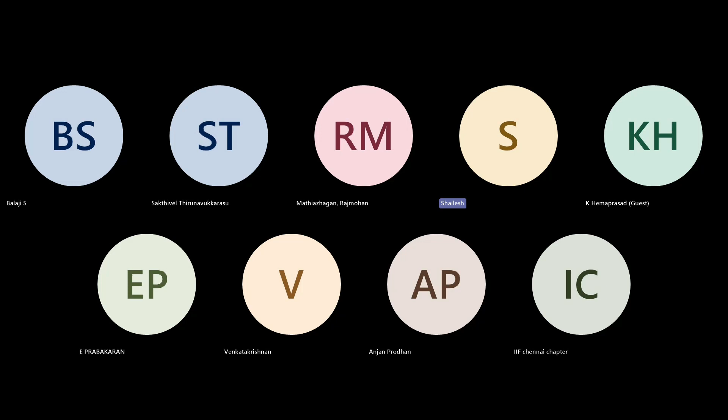Okay, first of all, thank you to the IIF Chennai chapter for giving me the opportunity for this presentation on the topic related to foundries. My topic for today's webinar is removal of impure layer through shot blasting process.

Before starting this presentation, I wanted to brief where I'm working, what I'm doing, and what my company does. So I'll brief about our company, Pometon India, what it manufactures, and how it manufactures.

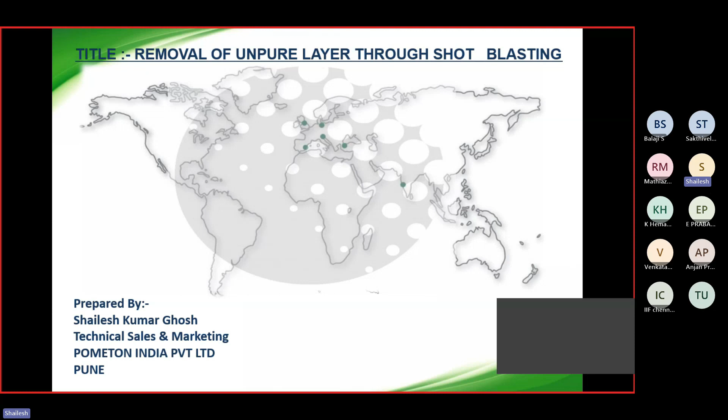Pometon India has an experience of 80 years in the production of metal powders and granules. It's based in Italy, and our manufacturing unit is in Italy, with close to 160 production employees at the Italy facility and a turnover close to 100 million. That is the data for 2021. Our headquarters is in Maerne, Venice, Italy.

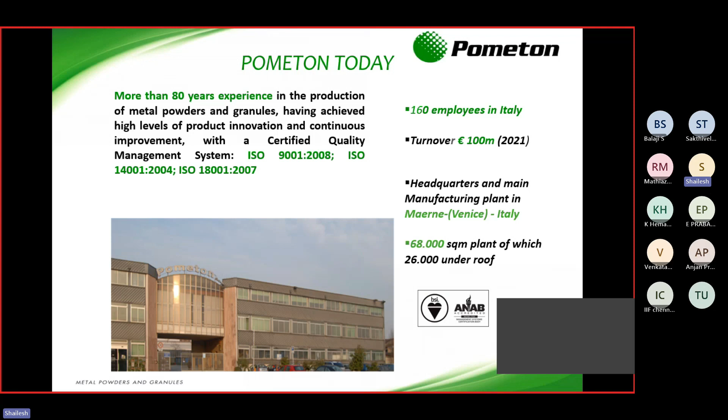This is the only company in the world which manufactures metal powders, both ferrous and non-ferrous, as well as stainless steel powder. We also manufacture stainless steel granules for shot blasting process. We have several sales and marketing offices in different parts of the world, like Germany, Turkey, UK, Spain, Italy, India, and Serbia.

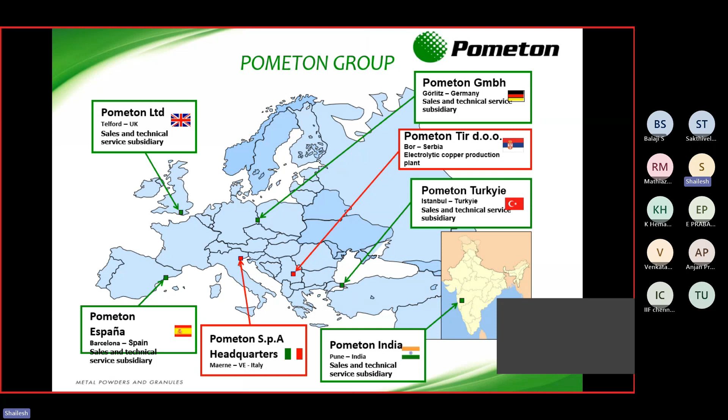Pometon manufactures both ferrous and non-ferrous powders, as well as stainless steel shots in its product portfolio. In ferrous powder, we have different grades of iron powder including high alloy, pre-alloyed iron powder, diffusion bonded grades, and plain iron powders. In non-ferrous powders, we have different grades of copper, brass, bronze, zinc, tin, and nickel. In stainless steel shots, all grades like 304, 430, and 202 stainless steel grade for blasting are available in the product portfolio.

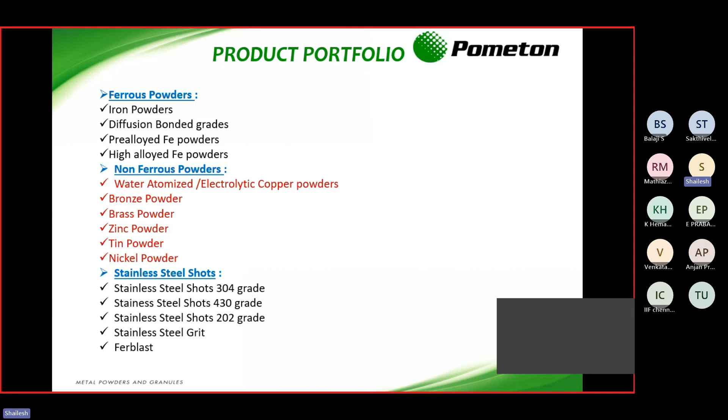Now we come to the topic: what is shot blasting? Shot blasting is a surface treatment process utilizing high velocity shots and abrasive. Shot blasting is a strategy through which it is conceivable to get great cleaning and surface treatment for secondary operation.

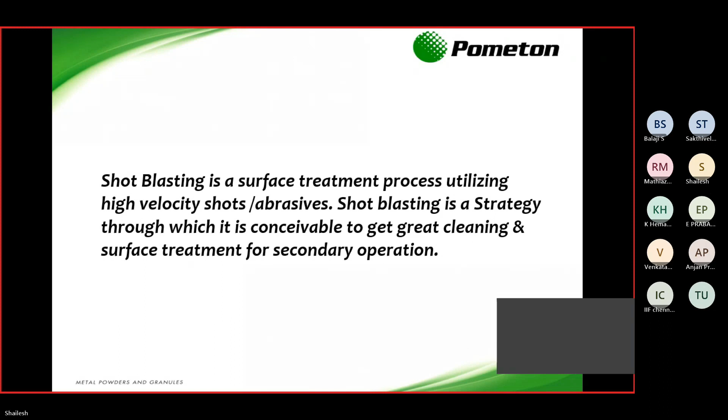This question arises very frequently from many manufacturers: what is the difference between shot blasting and shot peening? Shot blasting, as I already told you, is a cleaning and surface treatment process through which we clean components for secondary applications like coating, painting, and other things. Shot peening is a process of modifying surface material properties through the addition of compressive stresses; its main purpose is to improve strength and fatigue resistance. Shot peening is mostly used in industries like gears, springs, and pistons, to increase fatigue strength and avoid wear of the gears.

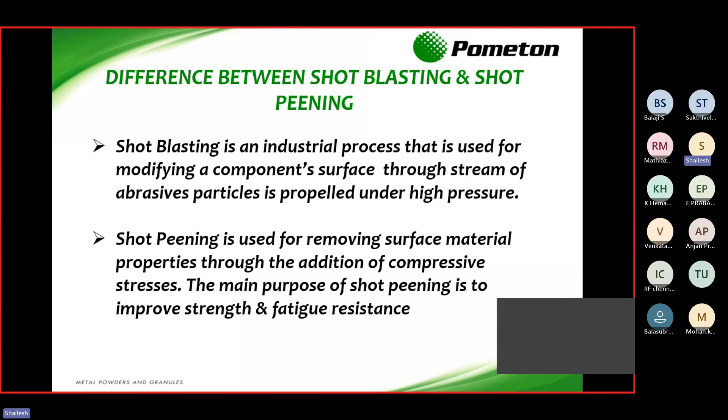So, shot blasting is utilized mainly for applications like iron, steel, non-ferrous casting, forging, GDC, PDC, LPDC, investment casting, etc. Other applications are preparing surfaces to be painted and coated. Before that, we require shot blasting to remove the oxide layer from the component and avoid peel-off issues after painting and coating.

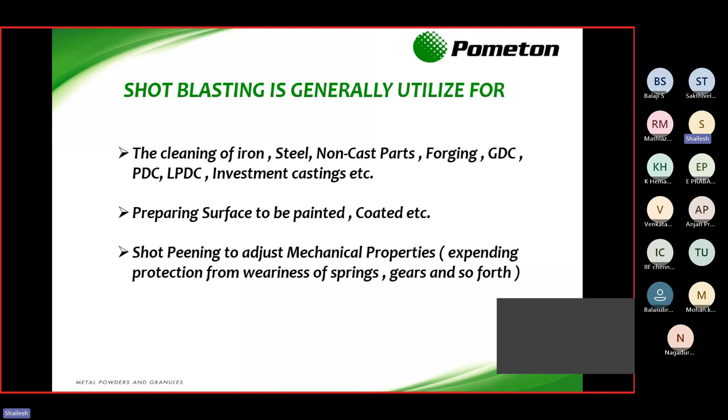Also, shot blasting provides uniform surface and aesthetic look for better appearance. And while shot peening, as I already explained, it is used to increase the stress and wearness of spring and gear. So these are the different applications used mainly in all the industries for shot blasting.

Actually, almost in every industry we can see now shot blasting is being used. If you consider automobile also, automotive components, aviation, everywhere it is mainly using shot blasting for surface cleaning and surface preparation. So these are some of the applications like in shipyards, cleaning and preparation of profiles and sheets before painting, portable machines for the maintenance of ship hulls.

In automotive components, we know it is almost used everywhere, whether it is LPDC, GDC, PDC, investment casting, etc. Also, shot peening applications are used in gears, springs, elastics, gearboxes, piston connecting rods, etc. Or in automotives, cleaning and preparation of truck tires before painting, brake shoes and clutches. In brake shoes also, where adhesion is required, it has to be done through the shot blasting process, because after that only proper adhesion is achieved.

Cleaning and rectifying of engine components, block, pistons, etc. Screw mechanical descaling. In aviation, portable machines for rubber elimination and roughness in the airport tracks. As we have seen already, the marks of the tire which come while take off and landing, it can be removed through the shot blasting process. Shot peening of airplane components to increase fatigue resistance, airplane paint removal, etc.

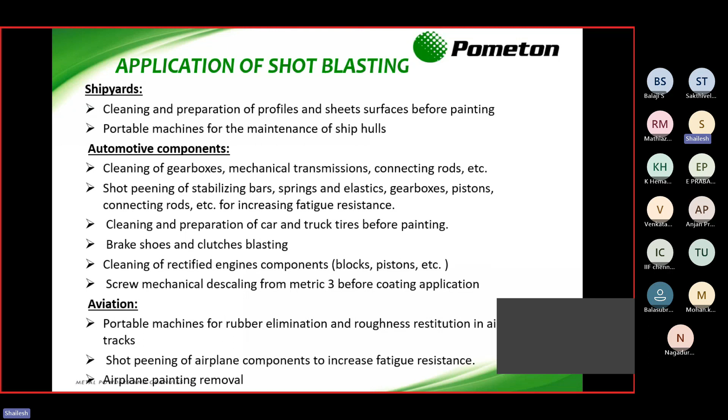Some other applications are like in motorbikes, cleaning and preparation of bicycle frame and tires before painting. Rubber, cleaning and preparation of steel parts before rubber application. As we know, if we have to join some rubber with metals, it requires a very rough surface for proper adhesion of the rubber and metal.

So in certain applications, we have to do shot blasting with more roughness which can be used for proper adhesion. Concrete and ceramics also, for blasting of non-slippery floors, artistic blasting, coach builders.

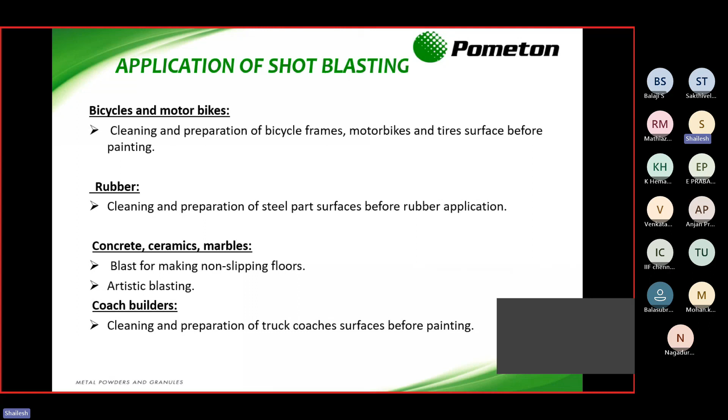Nowadays, as we know, India is making all the coaches like Vande Bharat and other coaches. We are exporting also. See, a large number of shot blasting machines are being used. We use it for coaches before painting.

Metallic structure and profiles - these are all applications of shot blasting. Cleaning and preparation of steel and profiles before painting, we all know. In iron foundries, removal of foil, framework, surface homogenization, melting of iron, steel, bronze is required.

Cleaning of painting system hooks. As we know, this is where the painting application happens in certain industries. So what happens after painting, all the jigs are full of paint and other additions, so it has to be removed. It has to be removed through the shot blasting process only. And in this application, most of the time zinc shots were used.

Zinc shots were used because they are non-flammable actually. But if you use other shots like stainless steel or MS shots, they may catch fire. So most industries use zinc shot for this application, mostly for cleaning of jigs in the painting booth.

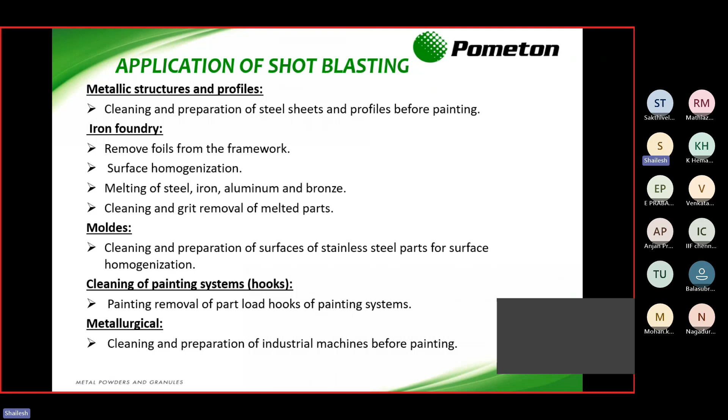Metallurgical cleaning and preparation of industrial machines before painting. Petroleum and gas - cleaning and preparation of CNG gas cylinders and petroleum stationary tanks before painting.

All these applications are very necessary before painting, because if you will not do this blasting, later on the peeling-off effect will occur after painting. So blasting is necessary. Blasting and shot peening of petroleum pump rods to achieve the desired stress.

Iron and steel industries - mechanical descaling of round, hexagonal and square bars for wire drawing operation, mechanical descaling of coil rods. This is important actually.

Nowadays we can see, for fastener manufacturing, coil rod is blasted before making fasteners. But earlier, chemical process was used for the descaling purpose, but that was too expensive, even more time-taking. So now, after shot blasting has come, time has reduced for the descaling process, even expense is less. So all these are the advantages of shot blasting over using chemical process in coil rod cleaning.

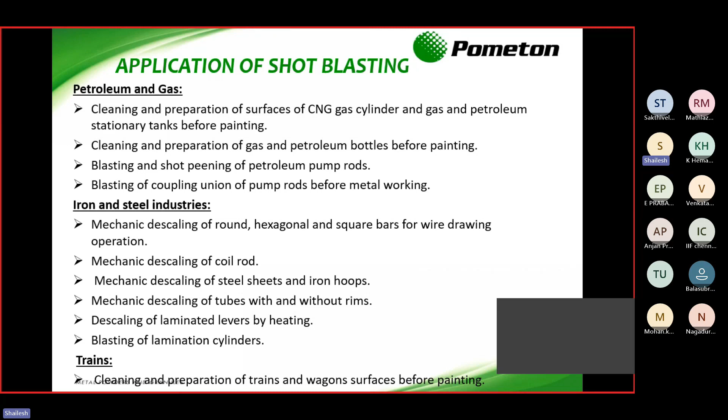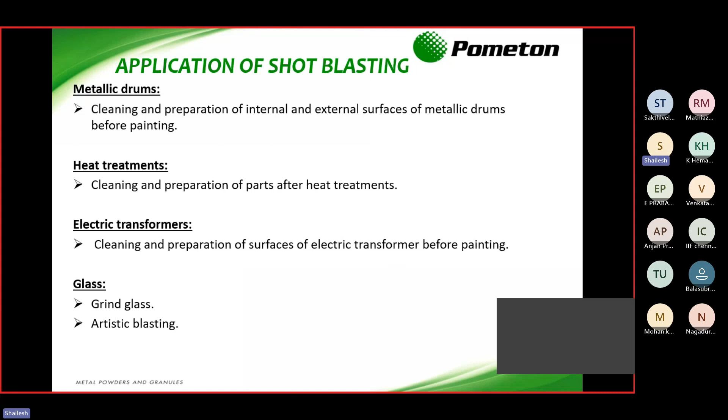So all these are the major applications of shot blasting. We can see different sectors also - we are using it in electrical transformers also. We have to do certain shot blasting operations for the cleaning and preparation of surface in electric transformers. Basically, these jobs are done before painting and any coatings to achieve proper surface finish.

Now, I'll explain the cast shots manufacturing process, how the shots are manufactured.

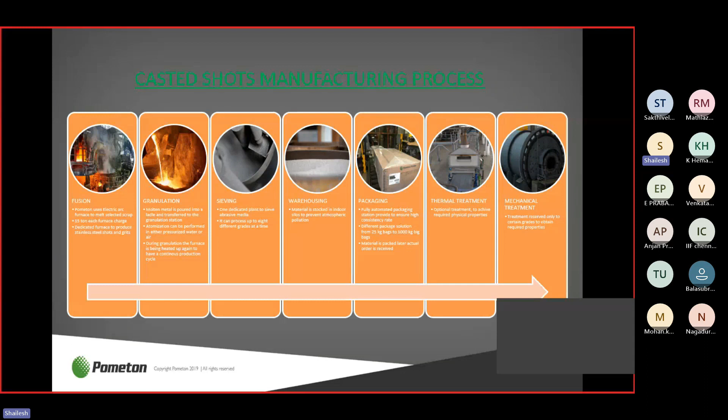We can understand there are different abrasives we are using for shot blasting, like cut wire shots, stainless steel cut wire, MS shots, MS casted shots, and other abrasives used in the shot blasting process. I'll explain the brief of casted shots manufacturing process, how casted shots are actually manufactured.

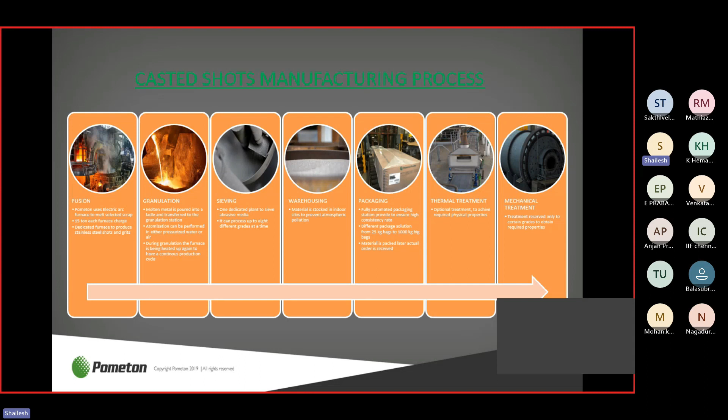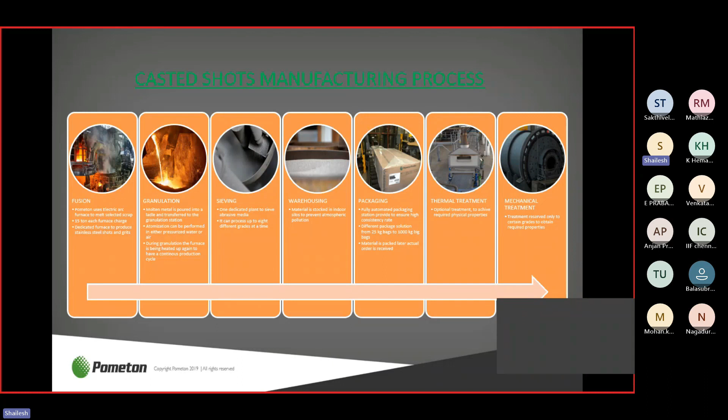The first step of the manufacturing process is fusion. In this process, all the alloying material and scraps like iron, chromium, nickel, whatever grade of shots we want to manufacture, is fused in an electric arc furnace. These furnaces have a minimum capacity of 25 tons at one charge.

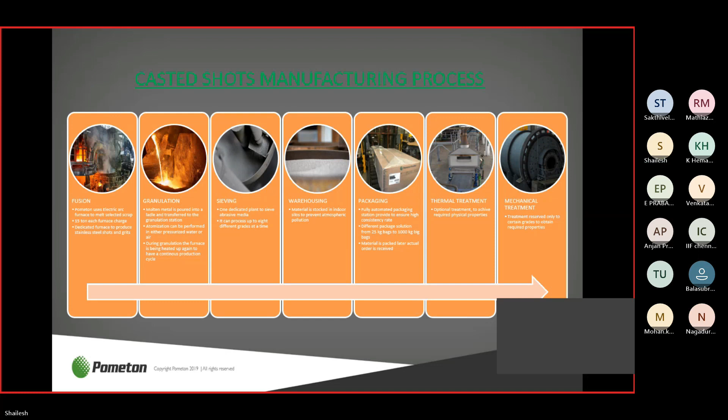So in this process, all the alloying materials are melted in an electrical arc furnace, and then it goes for granulation. What happens in granulation? We have to give the shape, round shape, to the shots. In this process, molten metal is poured into a ladle and transferred to the granulation station.

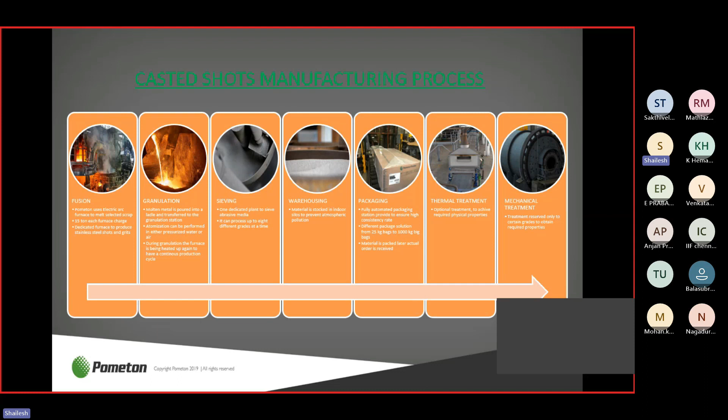Here we do air and water atomization to give the proper shape of the stainless steel shots. Atomization process can be either by air or water, both, depending on what categories of shots we require. During granulation, the furnace is being heated up again in a continuous production cycle.

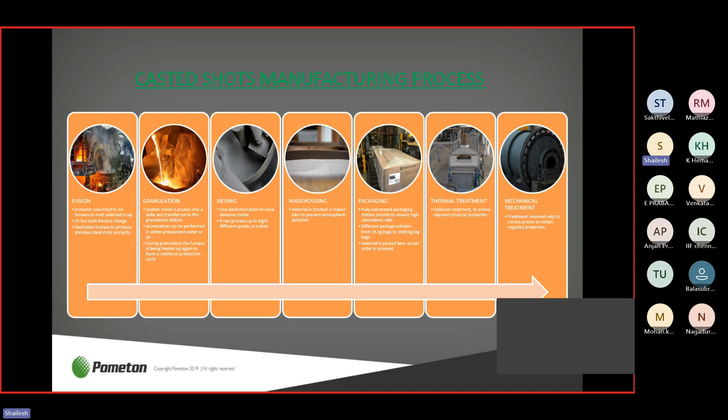After granulation, the shots are put in a water bath where they're kept for some time, and after that they go for drying, and then come to a sieving station. In the sieving station, sieving is done to segregate the different sizes of shots manufactured during granulation.

In the granulation process, we get different sizes of shots, not particularly one size, as we know. So we have to sieve it, separate and segregate all the sizes of shots according to the requirement of the industries.

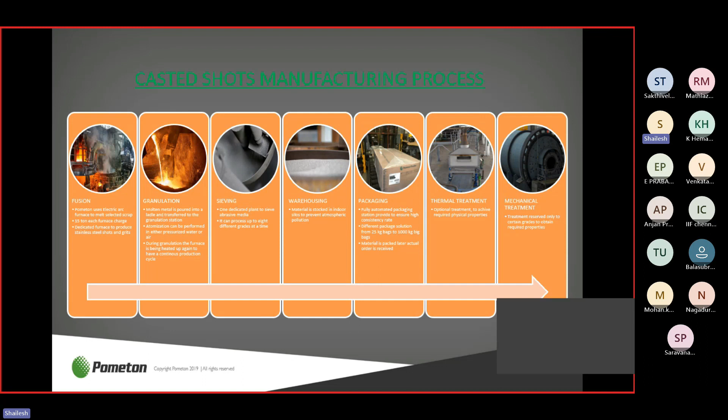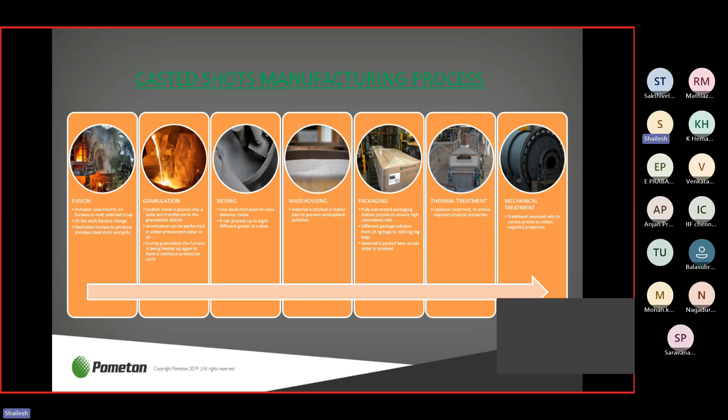After sieving, all these shots are kept in warehousing, in silos, to avoid atmospheric pollution. After warehousing, certain grades of shots require thermal treatment. Why do we do thermal treatment? Thermal treatment is required just to achieve the proper hardness of the shots.

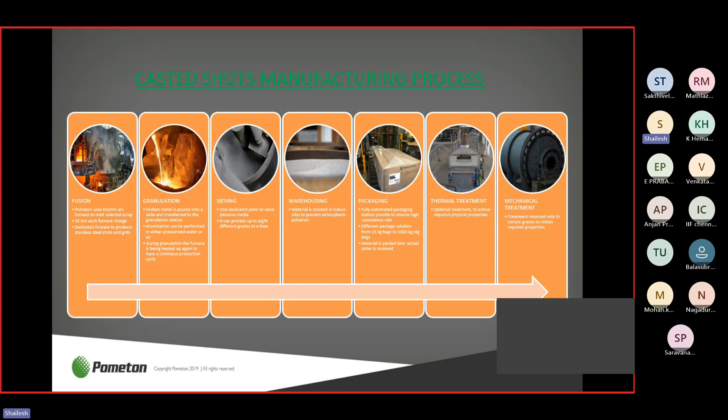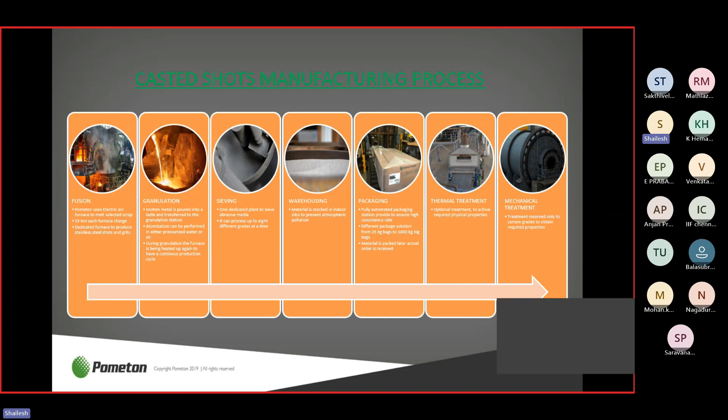After granulation, we quench it in water, where the hardness comes very high, close to 50 to 55 HRC. But sometimes we don't require that much hardness of stainless steel shots, so we have to do thermal treatment to maintain the hardness up to 45 to 50 HRC. This is not for every grade; only for certain grades of stainless steel shots do we have to do thermal treatment just to achieve the required hardness.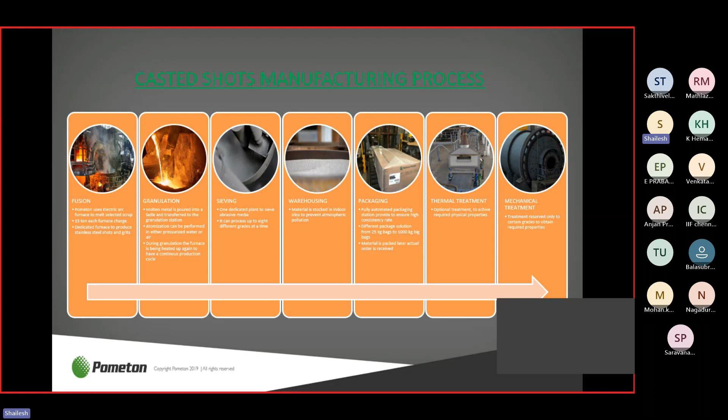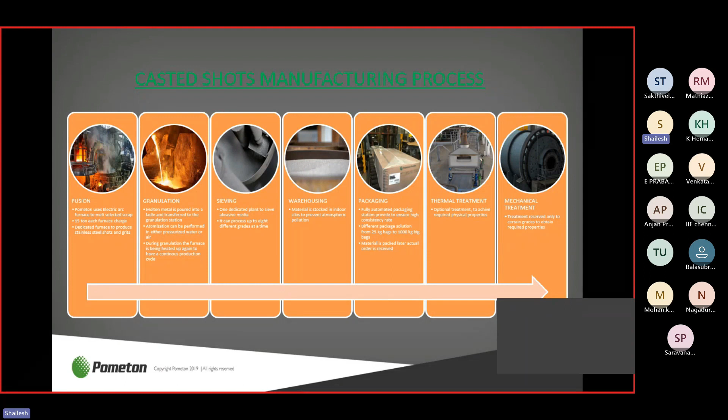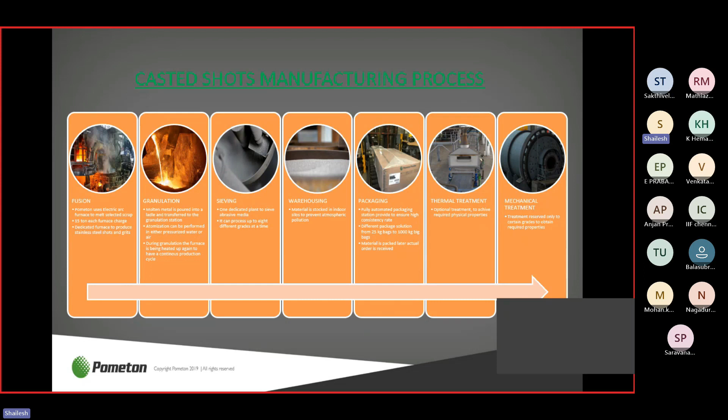Again, it goes for mechanical treatment, but this is not for all grades of stainless steel shots. This process is mainly for stainless steel grades where the hardness has to be very high, like 55 to 60 HRC, and where the shape of the grit has to be angular, not round, so it can work very aggressively to remove all the scales from forging parts and other surfaces that are hard to clean.

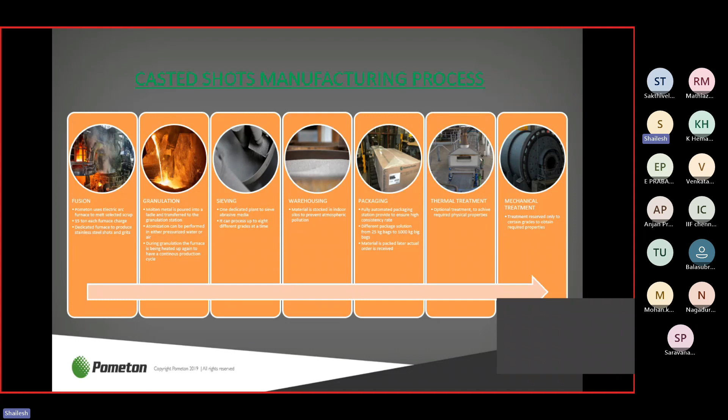So this mechanical treatment process is mainly for the grit, where we have to change the shape of the shots into angular grit, and also increase the hardness of the grit, which is very high, close to 60 HRC. So this is all the process about casted shots of stainless steel.

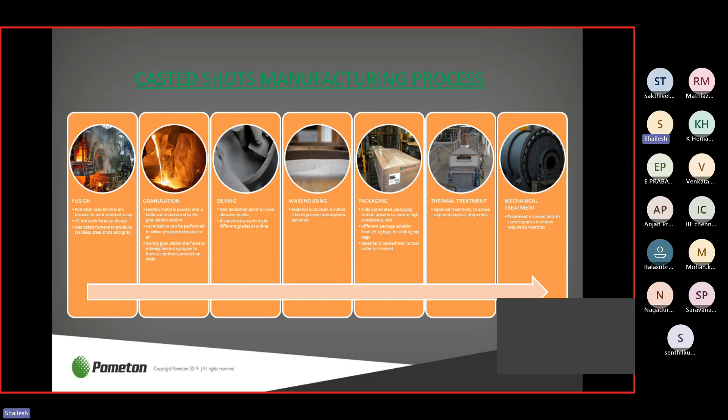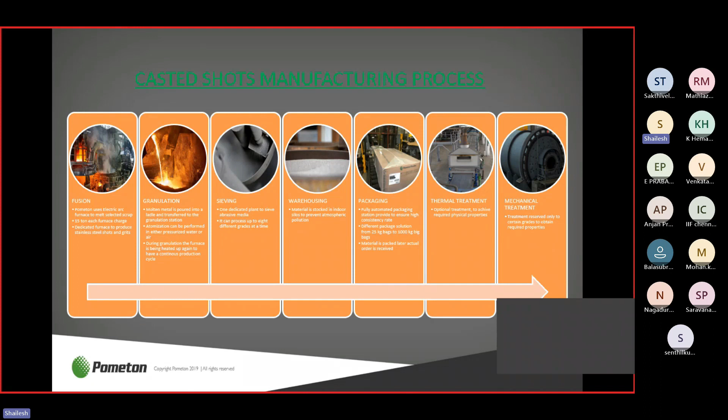I have not mentioned the stainless steel cut wire manufacturing process. As we know, it's simply drawn wire cut into pieces, and it goes for a rounding process.

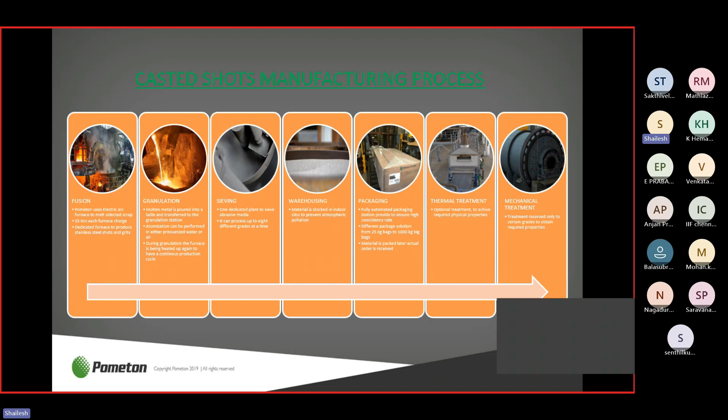Now, if we are talking about the shot blasting process, it is important for the selection of the machine, what kind of shot blasting machine we have to use, what different types of shot blasting machines are available in the market, and how we choose the shot blasting machine. We will discuss all these things in the further slides.

Okay. Shot blasting machines mainly operate in two types. Most of the people must be knowing, but I'm telling all this: pneumatic blasting and mechanical wheel blasting. In pneumatic blasting we use high pressure air to operate these shot blasting machines, and in mechanical wheel blasting, as we know, we use wheel velocity for the shot blasting purpose.

So these are some applications where we do shot blasting, like pre-paint adhesion, pre-plate finishing, surface cleaning, peening for strength, coating removal, deburring, rust removal, scale removal, etc. So blasting is the acceleration of particles by air or mechanical means to a surface or workpiece to achieve a variety of physical effects.

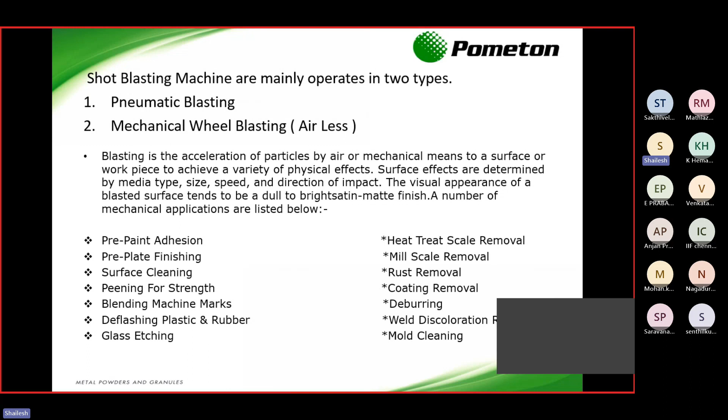These are the two types. Basically, shot blasting machines work on two principles. One is pneumatic and another is mechanical wheel blasting. So in further slides, we will understand how this works. So, pneumatic blasting. Pneumatic blasting uses an air compressor to accelerate an air stream combined with media onto the workpieces.

Actually, there are two types of using accelerated air. First is suction and another one is pressure. So how does a suction machine work? It works on the Venturi principle actually. So if we see the diagram, if we put the compressed air inside the nozzle, it creates a negative pressure towards the airflow, which causes the blast media to come and eject through the nozzle, which creates the blasting during the shot blasting process.

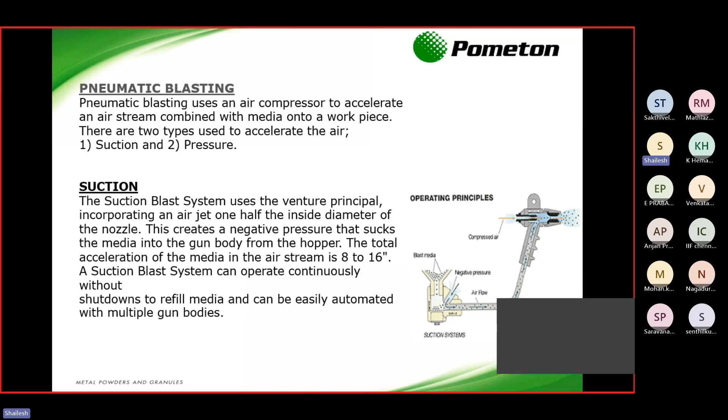So this is one type of pneumatic blasting machine, which is suction type, and another one is pressure type. The pressure system utilizes a pressure pot that, when pressurized with the media in the pot, accelerates the media from the pot through the blast hose to the nozzle. In this principle, if you see the diagram, the compressed air and the blast media come from separate hose pipes. After that, in the pressure system, both compressed air and blast media come together and eject the shots through the nozzle. So this is another type of shot blasting machine which is commonly used in current industries.

If you see the impact energy of the pressure shot blasting machine, it will be half of the mass into velocity squared, which makes it apparent that the pressure system is highly efficient. When the mass of the media is doubled, the kinetic energy will also be doubled. And when the velocity of the media is doubled, the kinetic energy is quadrupled. So this is important to understand. Okay.

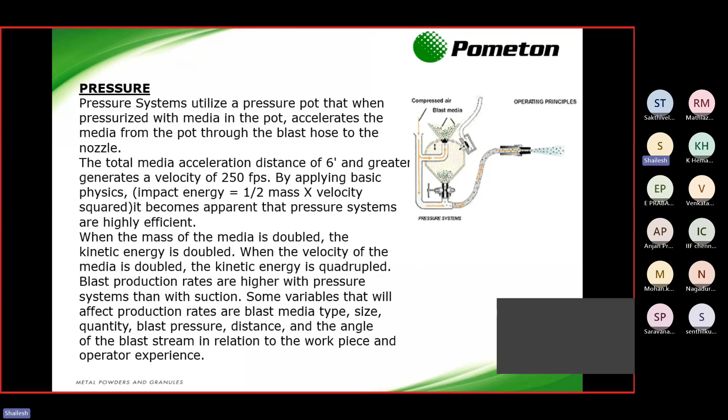Next is airless, which is mechanical wheel type blasting. This is a very common type of shot blasting machine used in industries now. This can be a hanger type machine, a tumbler type machine, a rotary barrel type machine. It can be of different types, depending on the applications and the size of the component. We can select any of the shot blasting machines. It totally depends on the size of the component, the number of components, and how much time you want to give for the shot blasting process.

So these are the most common types of shot blasting machine, mainly used in the automobile sector, fastener industries, and other small component industries. Basically, tumbler type and rotary barrel type machines are commonly used by fastener manufacturers, small component manufacturers of automobiles, bushes, and other things.

But if we consider big components of LPDC, GDC, and PDC, we have to choose the hanger type of shot blasting machine, in which we can blast at least 60 to 70 components at a time, depending on the size of the components. So yes, these are the most common types of shot blasting machine which industries are currently using. So these few things we have to consider while selecting the shot blasting machine.

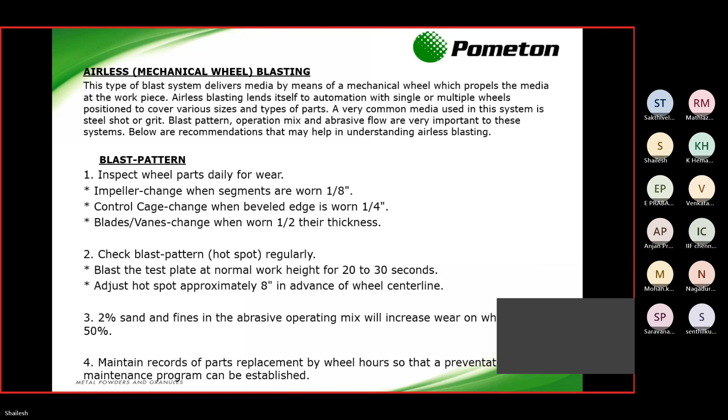If the dust collector is not properly cleaned or maintained, or if its bags have worn out, then definitely your component finish will not come up to the mark. It will come in a blackish color, or a very dull finish. So we can say the dust collector is the heart of the shot blasting machine. I have seen in many industries they have not even bothered about the dust collector, but if we want a very good finish and good aesthetic look, we have to take care of the dust collector.

I was talking about the dust collector. Yes, it is very important actually. And if we consider all these six basic subsystems of the shot blasting machine, one more thing is control and instrumentation. Now most of the shot blasting machines are coming with VFD panels and other things. Earlier it was not like that.